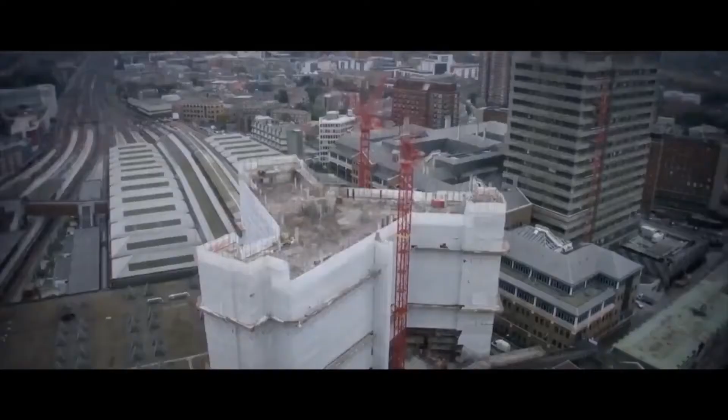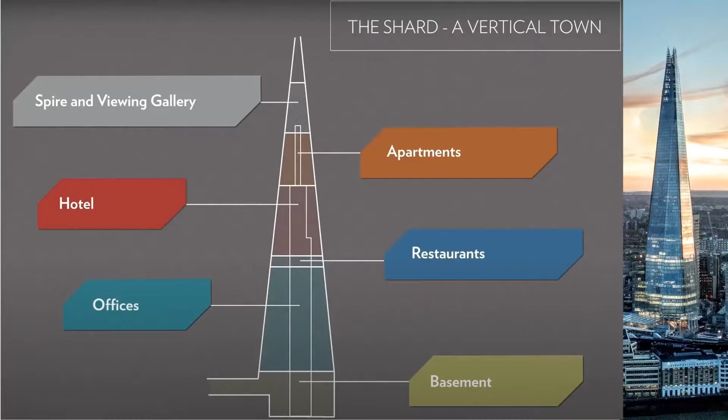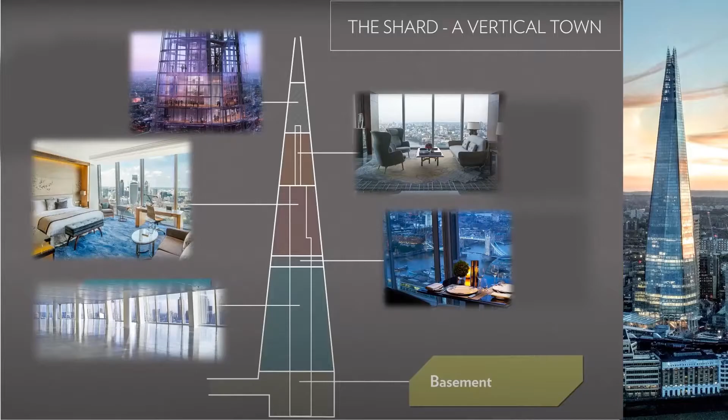Irvine Sellar, the developer of the Shard, wanted the Shard to be a vertical city with a variety of uses. The Shard is designed as a building which can perform various uses for each level. To make space suitable for each application, an optimized design was needed which was not constructible with one structure and one material. So constructors divided the composition of the building into three parts.

First, the Shard's largest and lowest part is used as office. There will be various arrangements for each office's purpose, so the lowest level of the Shard, which has changeable open space, is suitable for office.

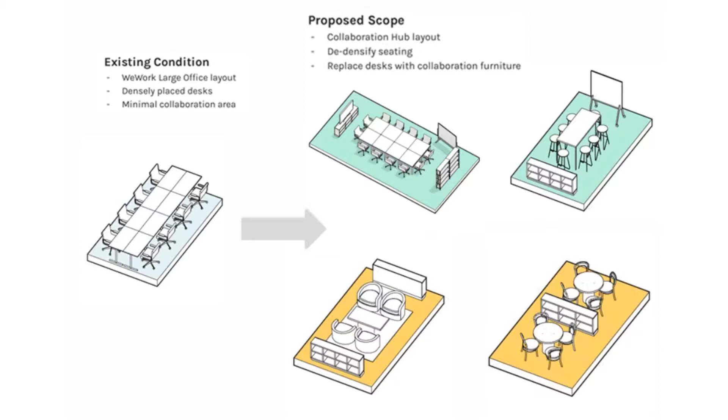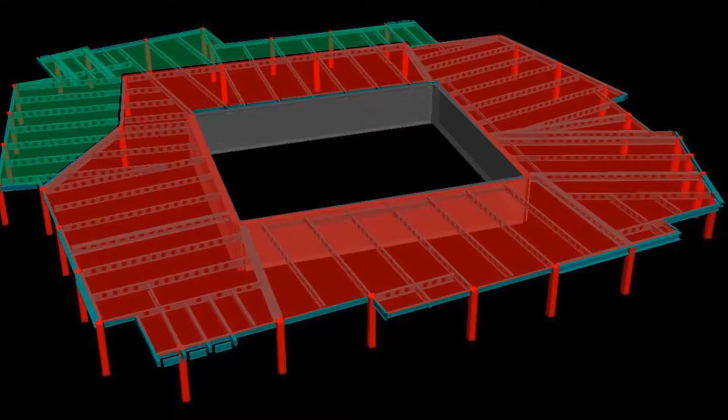To make large open space, designers had to reduce obstacles like columns. Composite beam structure is suitable for this. Due to this structure, very few columns are needed inside the area. The shape of the beam is key to making space without columns.

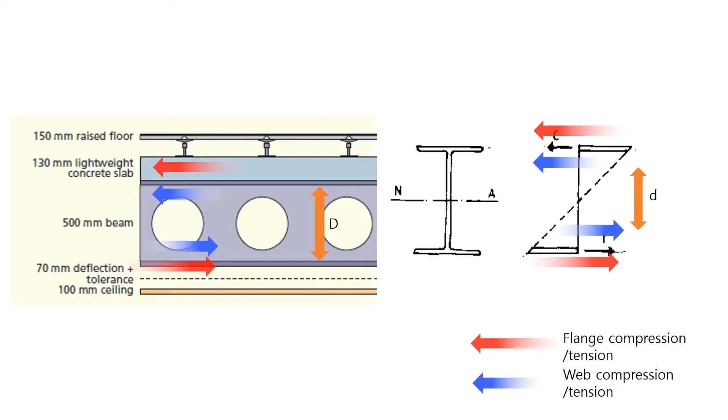The compound beam consists of 500 mm honeycomb beams and concrete slabs. Holes of the beam increased the depth of the web, therefore the moment of inertia of the beam is increased. This increased moment strength could make a 50-meter long beam without columns.

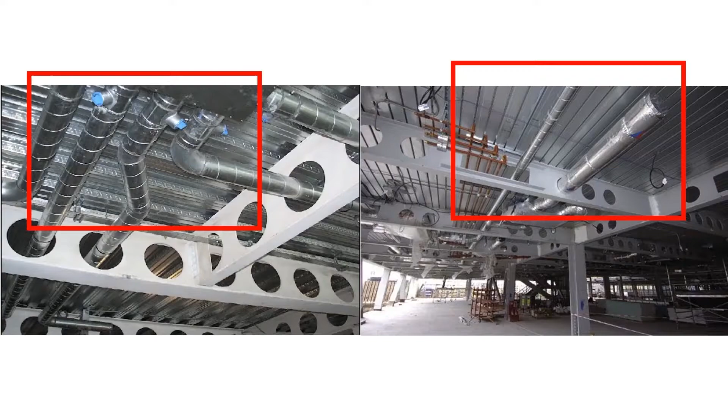And office needs air conditioning, ducts, piping, cables. Honeycomb beam made it possible to make the ceiling very thin, so the height of each floor could be reduced, which increased the number of floors.

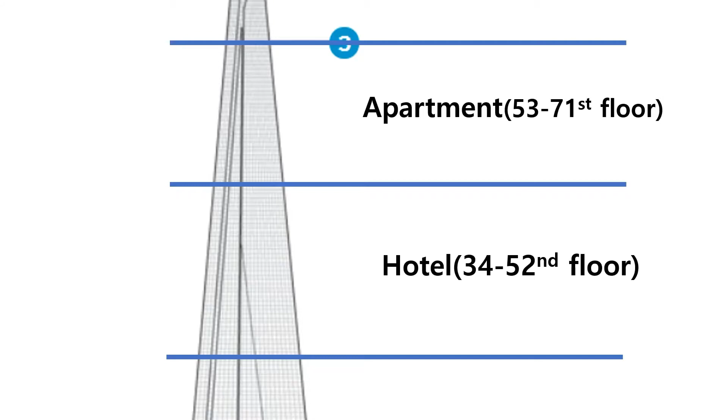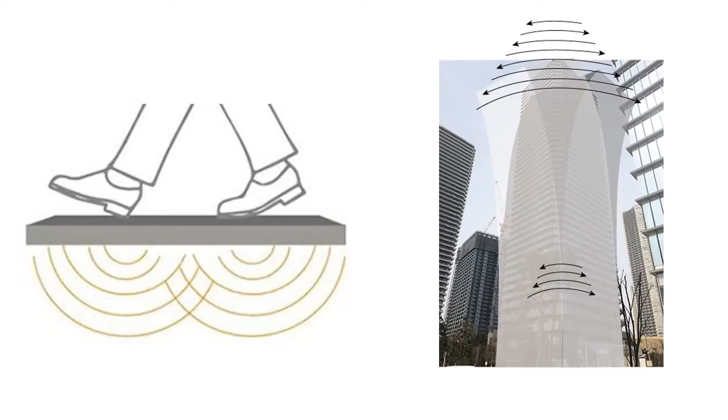Middle part of the Shard is used as hotel and apartment. Hotel and apartment need sound insulation and damper for comfort of residents. Concrete structure was suitable for these needs.

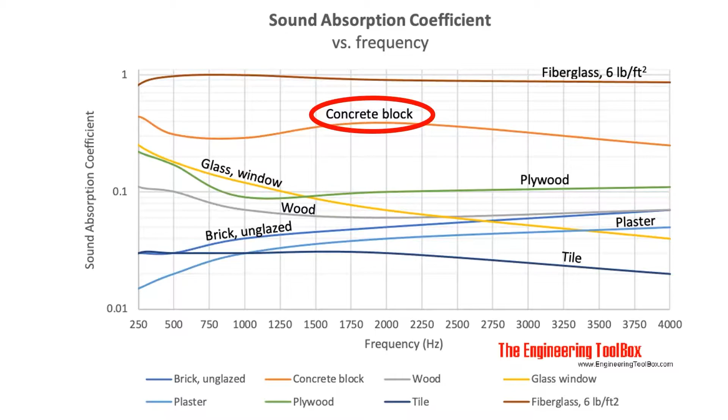Concrete has high specific gravity, which is proportional to sound insulation. Also, as concrete slab is thicker than composite slab, the sound insulation performance of residence floor is better than office floor.

And due to concrete's heavy weight, the concrete part provided damping to minimize lateral acceleration and reduces the swing of the building by wind.

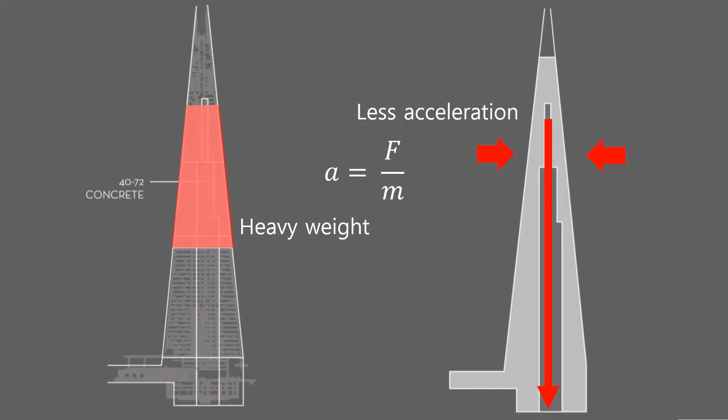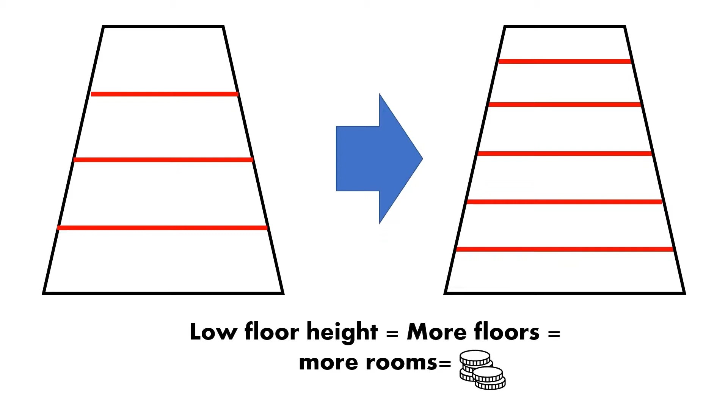And for the profitability of the hotel and apartment, designers had to put many floors in the limited height, so they wanted to reduce the thickness of each floor slab. So the Shard used post-tensioned concrete slab instead of normal concrete slab.

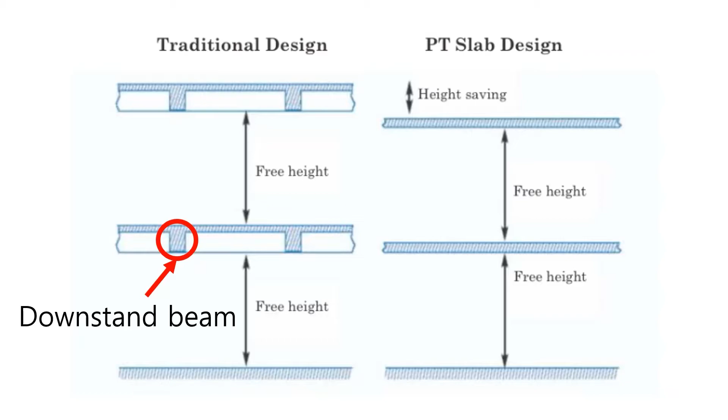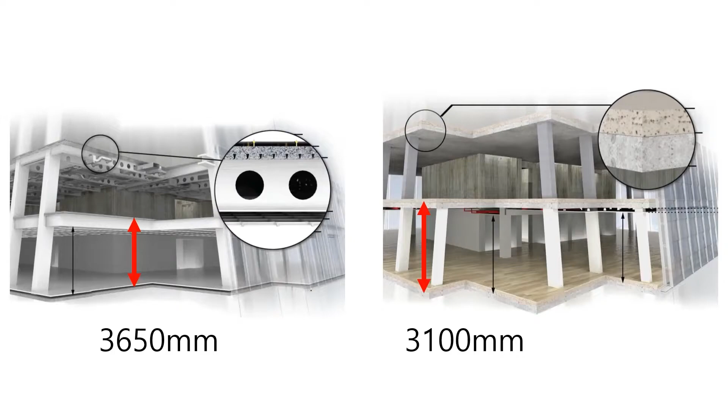Therefore, the downstand beam could be removed, and the thickness of the slab was reduced. So compared to composite beam floor, post-tensioned concrete floor reduced floor height by 550 mm. So extra 2 floors could be added.

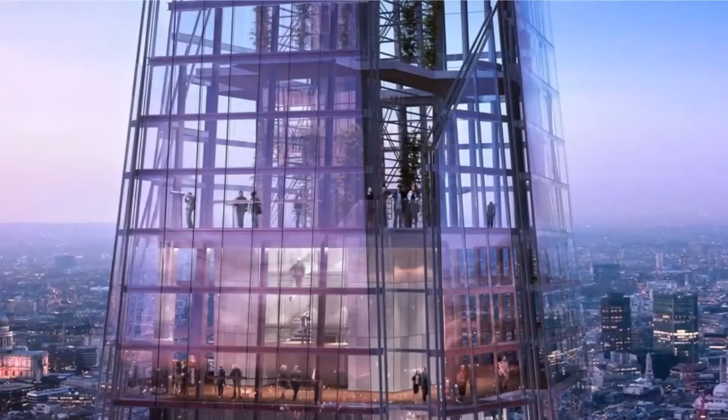The top of the Shard is used as observatory and radiator. The high-rise part of the Shard was not a good environment for apartment because of small area. So the designers made the spire as observatory and radiator.

And because of small area, high height, and fast wind, this huge steel structure could not be made at the site. So engineers adopted the module method.

To lift modules, each module must be lighter than 7 tons, which is the capacity of the tower crane. Each module was prefabricated in the factory of Severfield-Rowen at Thirsk, United Kingdom.

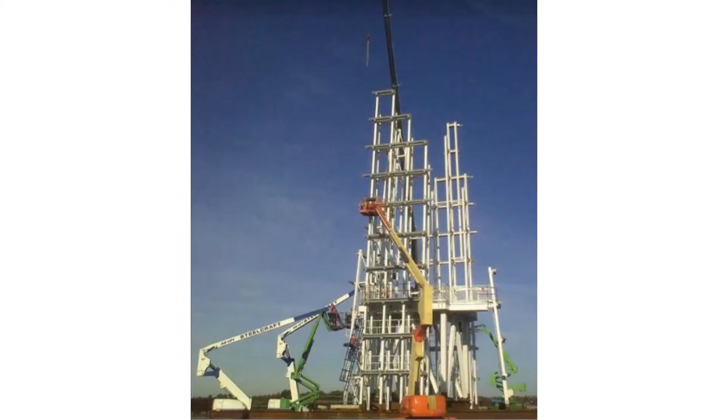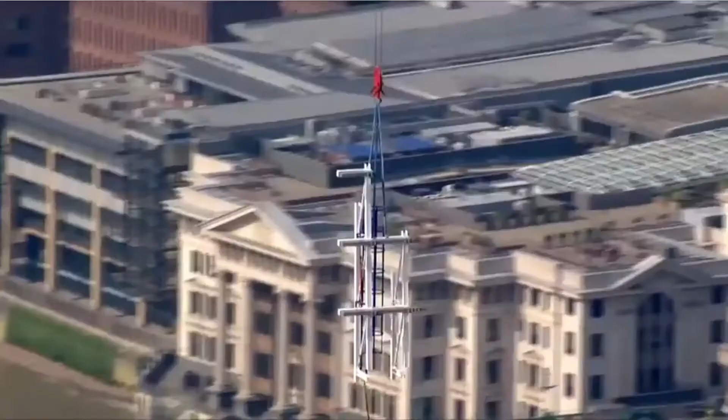To assemble the spire with no mistakes at site, constructors pre-assembled the entire spire at an airfield in North Yorkshire. Each module was lifted to site by tower crane 7 and assembled.

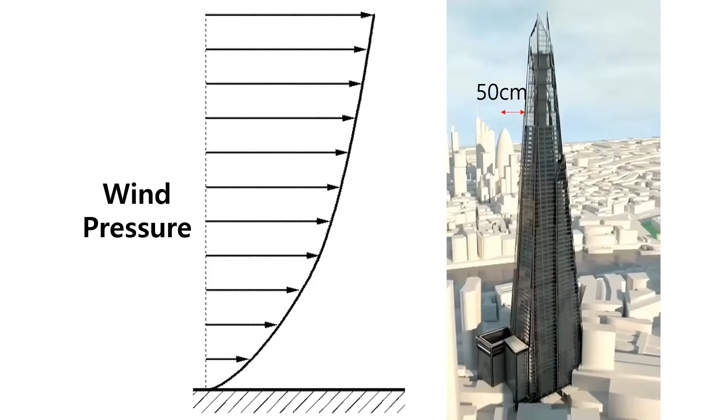An important problem exists in this high-height structure. High-rise buildings need to pay more attention to lateral load management. At this height, lateral load such as wind load must be considered because wind pressure is getting stronger as height goes up. Actually, in strong wind, the Shard is intended to move up to 50 cm.

To take lateral load, engineers designed a hat truss in level 66 to 67. The hat truss distributes lateral load applied to the core to perimeter columns, reinforcing the lateral strength of the building.

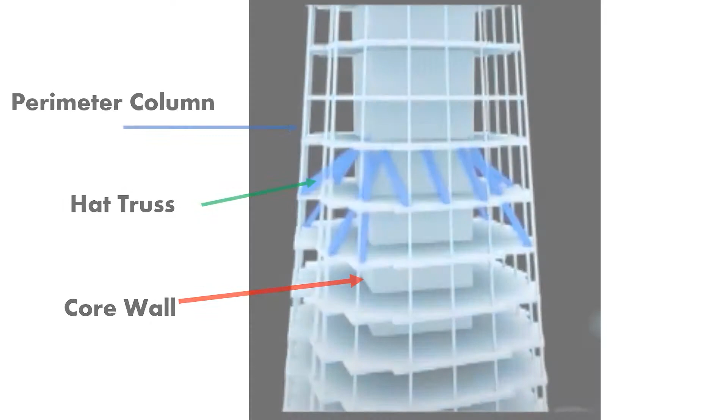It is like a ski pole. When you are skiing, something pushes you laterally. Your arm is the hat truss and the perimeter column is the ski pole.

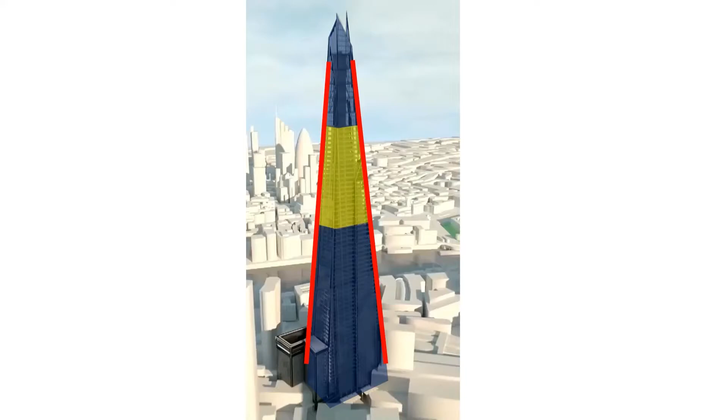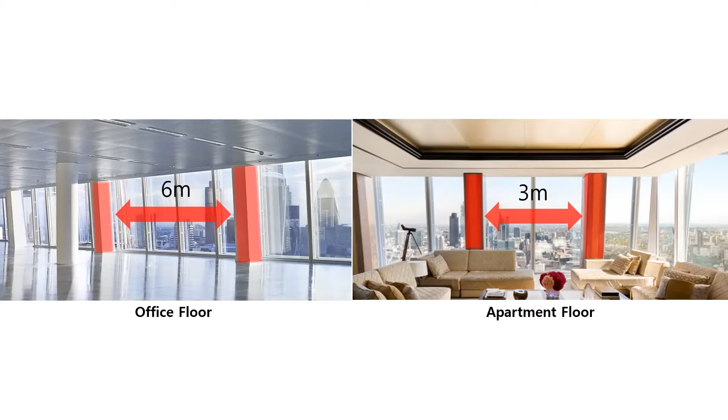But there were two connection problems at the perimeter column. First, there was a problem with the perimeter column span between the composite part and concrete part because of the use of other materials. The perimeter column span of concrete floor and steel floor are different. To make concrete slab without downstand beam, the limit of perimeter column span was 3 meters.

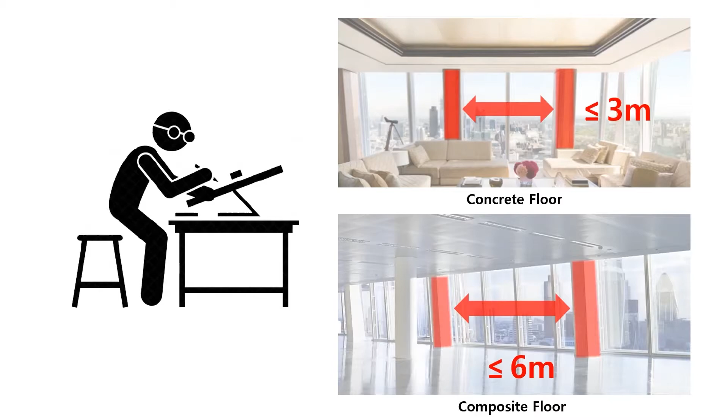Engineers found the solution to connect these two different columns. As a solution, in level 37 to 40, top of the steel levels, a belt truss changes the span of the perimeter column from 6 meters to 3 meters.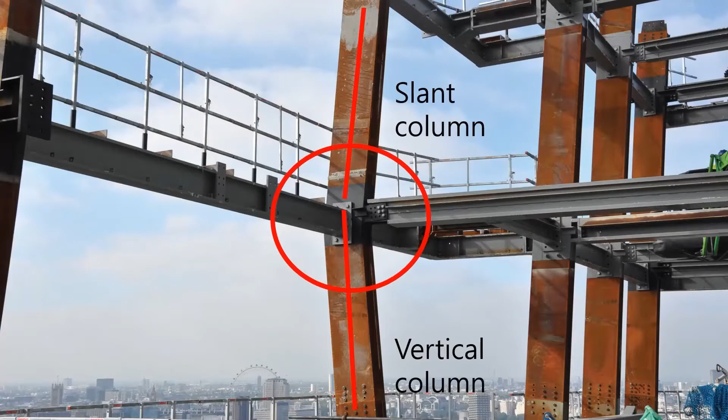And there was another problem in the perimeter column. The Shard seems to have a smooth tapered form, but look closely, it is not. The slant perimeter column transfers to vertical column by a load sharing system.

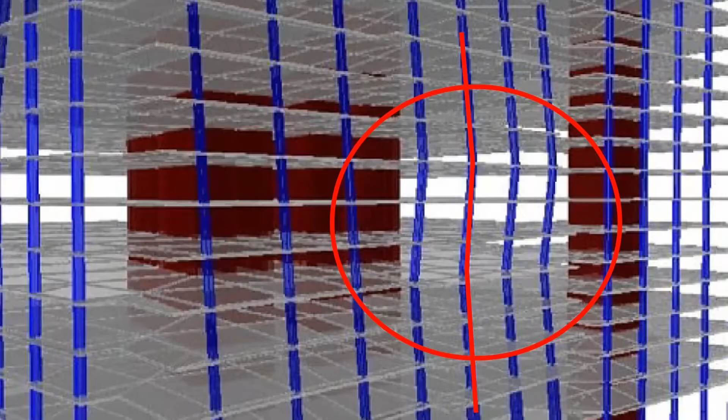There is even a column setback. The inclined perimeter columns step back towards the core because of the limit of ground level. Therefore, the changes of direction generate substantial horizontal push and pull forces.

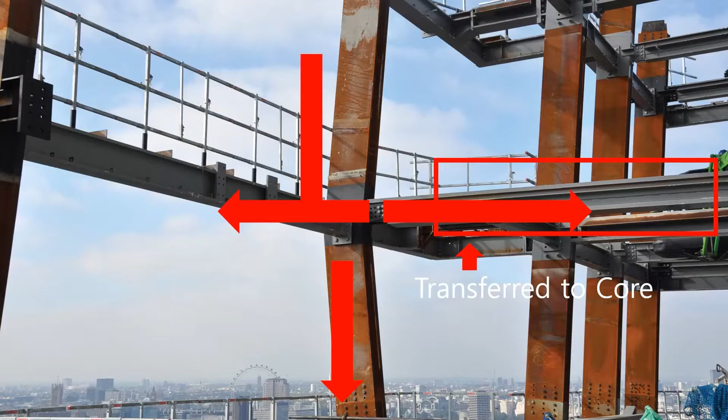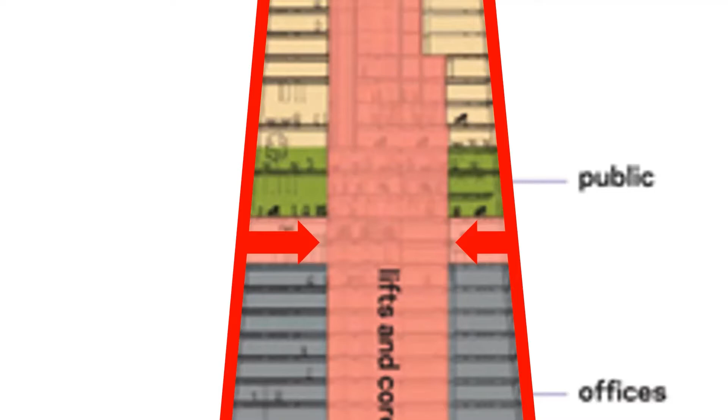These tension forces are transferred to the core by horizontal steel struts. The horizontal load moves from the perimeter column to the core, and the core load is transferred to the foundation.

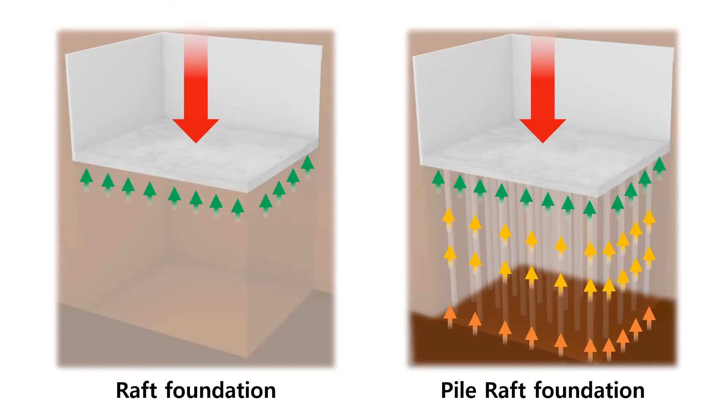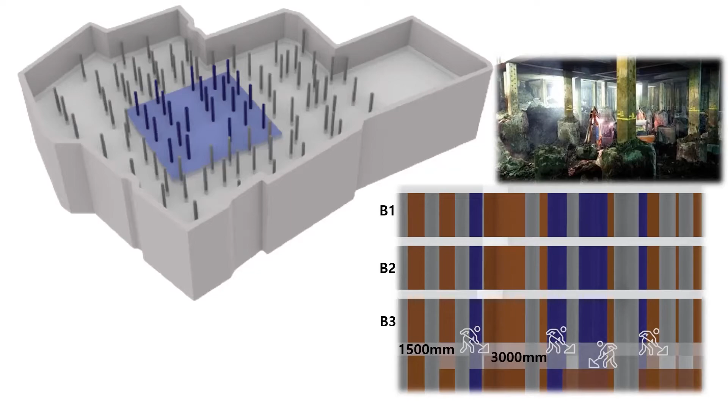The shard used a piled raft foundation to take huge loads. Unlike a raft foundation, the piled raft foundation disperses the load to the piles. The raft directly below the core, which is expected to take concentrated load, was designed at 3 meter thickness, and the rest designed at 1.5 meter thickness.

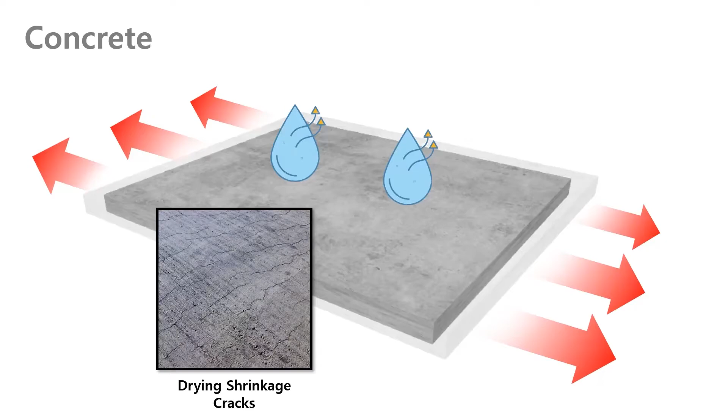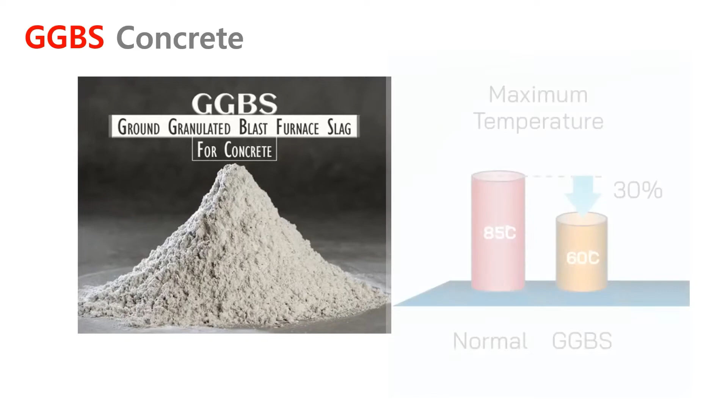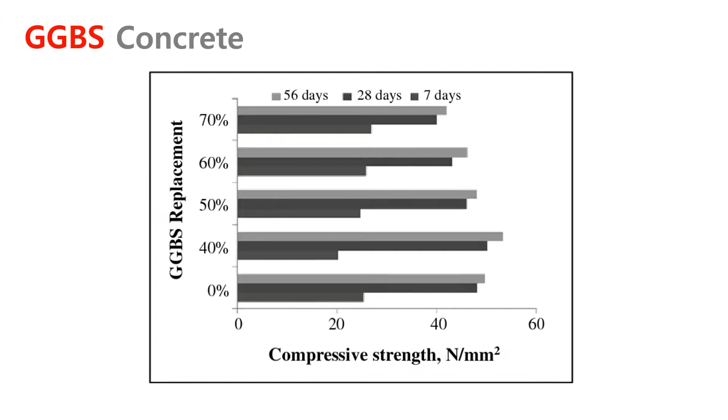In this huge scale of raft work, the problem of dry shrinkage cracks in concrete was important. To solve this problem, the shard used GGBS concrete. GGBS has low hydration heat and low dry shrinkage. GGBS concrete mix doesn't attain full strength until 56 days, compared to normal concrete which gets enough strength in 28 days. So the ready mix was further modified to make sure that enough strength was available at 14 days for work to proceed with core construction.

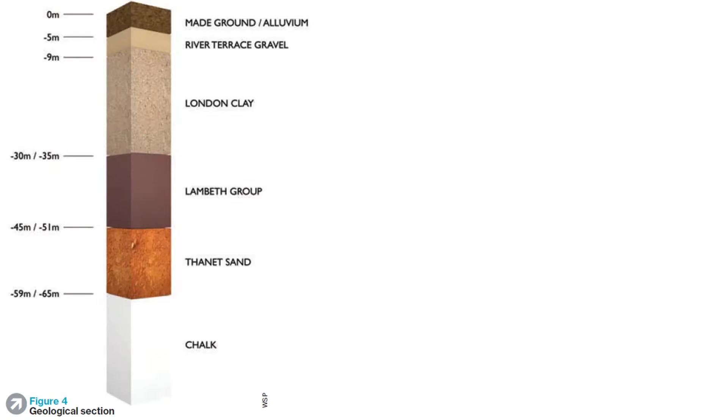Moreover, there were many things to be careful about regarding the ground where the foundation was installed. The shard's ground layers consist of alluvium, river terrace gravel, London clay, Lambeth group, and Thanet sand. There is groundwater between the London clay and Lambeth layers. Due to silty clay's property, London clay holds much pore water, which causes volume change of the soil.

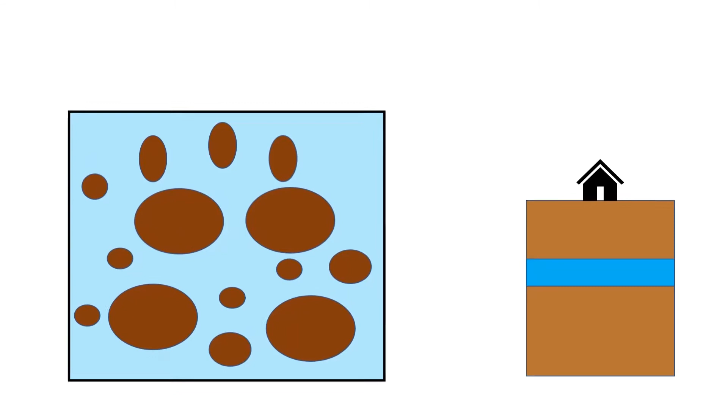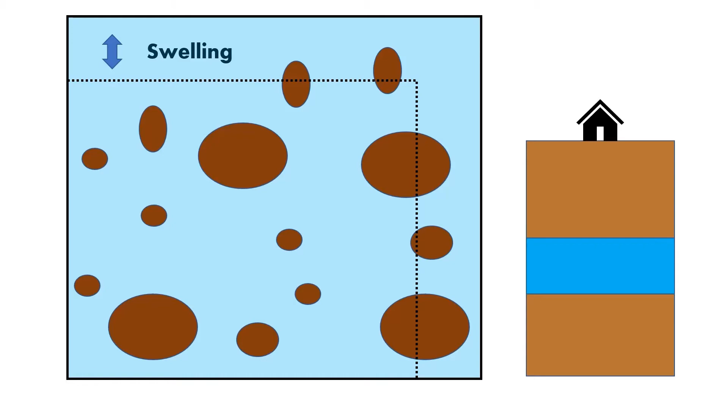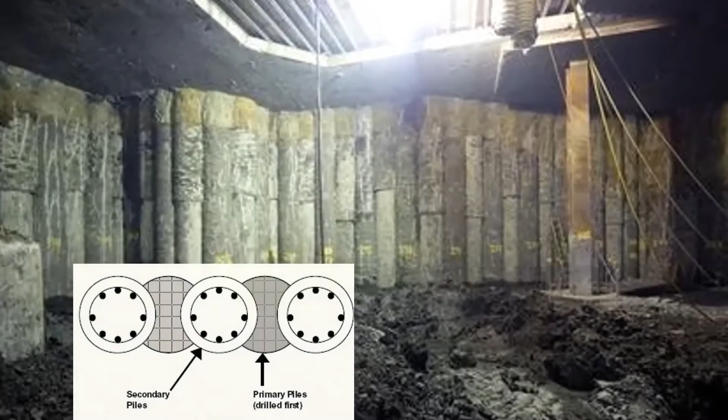It consists of primary piles and secondary piles. Primary piles formed a cutoff to the groundwater in the London clay, and secondary piles have 53 meter depth bearing in Thanet sands, which have more strength and safety compared to London clay.

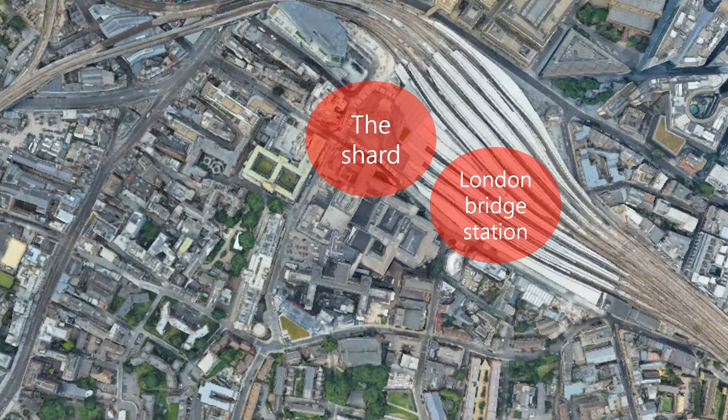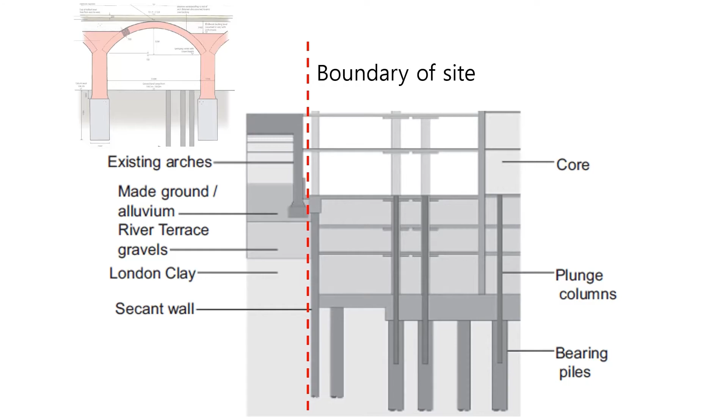When constructing the secant pile wall, there were many problems with the surrounding facilities. The shard is located just beside London Bridge Station, and the London Bridge Station is an arch structure. Because the arch structure and the construction of the shard were too close, and the arch structure was built a long time ago, it could have collapsed due to construction.

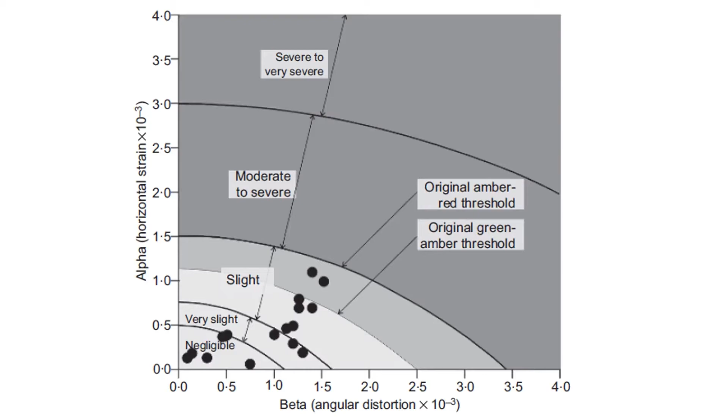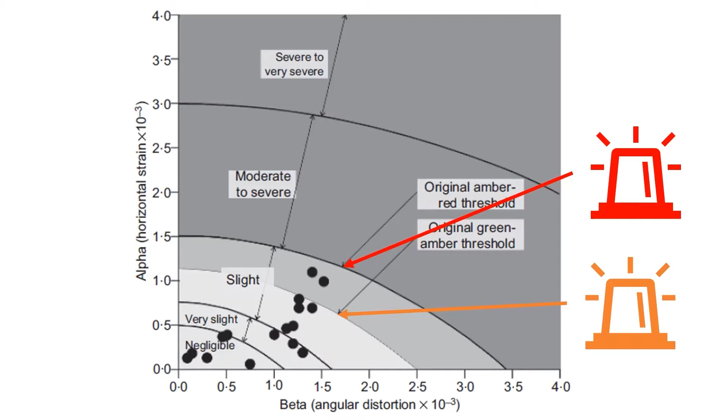Therefore, constructors of the shard monitored the movement of the arch structure. When movements were more than halfway through the slight damage range, an amber alarm would be triggered, and a red alarm was triggered when movement reached the lower end of the moderate to severe damage range.

There's a fault underneath the shard's ground layer, dividing it east and west. The fault made the east Lambeth Group's elevation at the top of strata 5 meters lower than the west. So longer piles were required on the east side of the site.

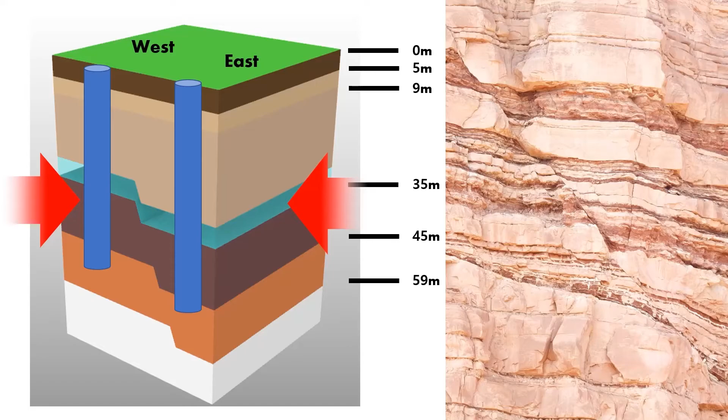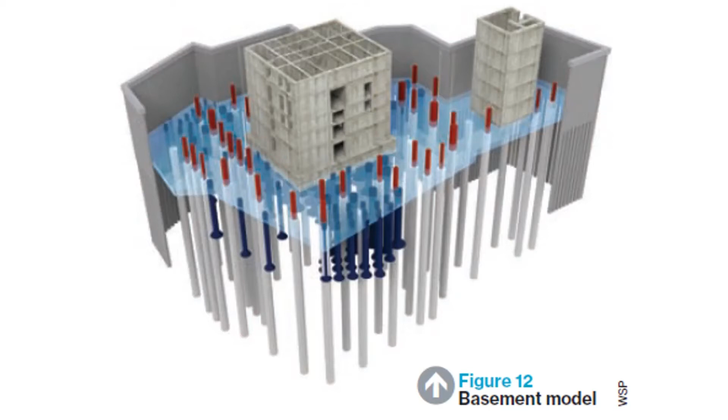Main bearing piles supporting the raft have 1,800 mm diameter, as well as 1,500 mm diameter, which is similar to the secondary piles. This optimized raft and pile design minimized the amount of excavation and material use.

Constructors of the shard used the rotary bored piling method to make the secant pile wall and foundation piles. This piling method has the advantage of minimal ground disturbance, which means limited risk of damage to adjacent structures.

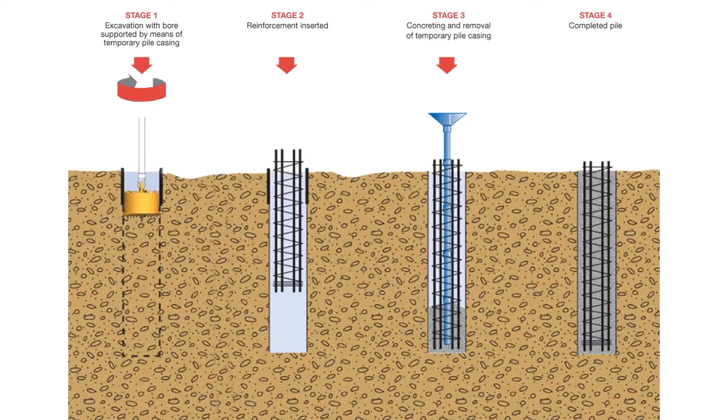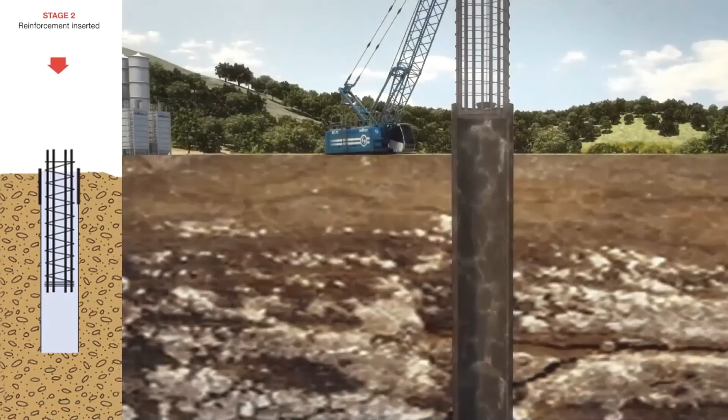First, excavate the soil to make the piles. Second, insert the steel cage. Lastly, pour concrete to make the piles.

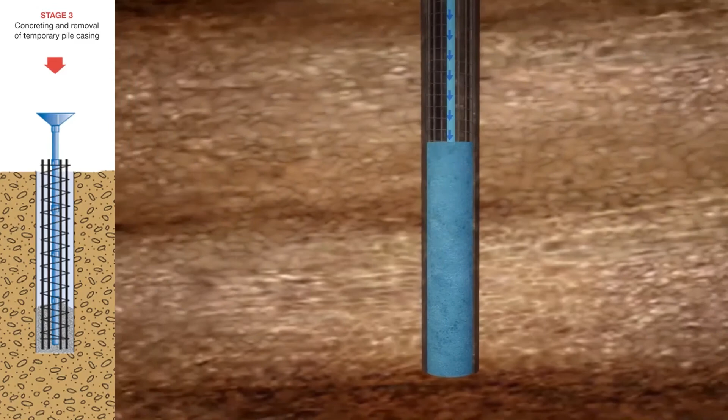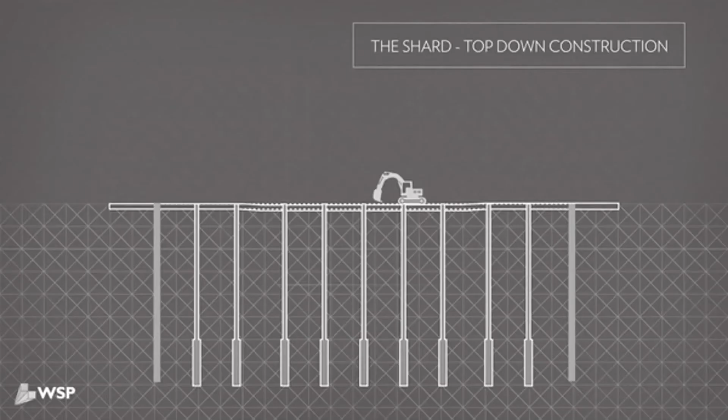After piling, the shard's challenging attempt began. Constructors tried to apply top-down construction to skyscraper construction by installing a plunge column on the foundation piles. Top-down construction is a construction method which excavates underground and constructs the core simultaneously.

After the piling, constructors excavated to basement level 2. After basement 2 excavation, the core slipform is installed above the plunge column and core construction is started. Simultaneously, excavation to basement 3 is started. When the core reached the 21st floor, basement 3 excavation was finished.

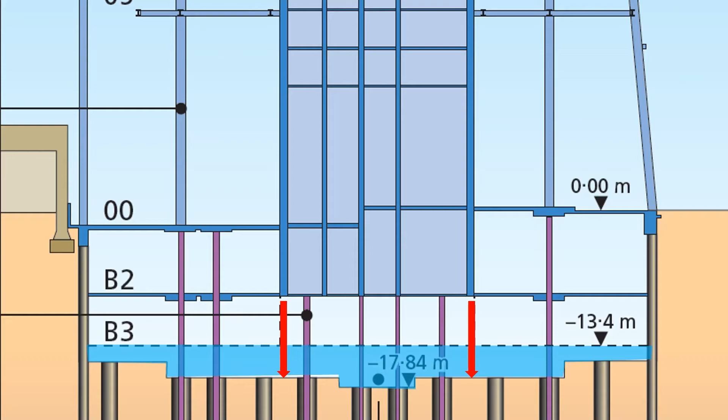After basement 3 excavation, constructors started raft concrete pouring and connected the core wall and raft. After the raft was finished, top-down construction was completed. As a result, they reduced construction time by at least 3 months.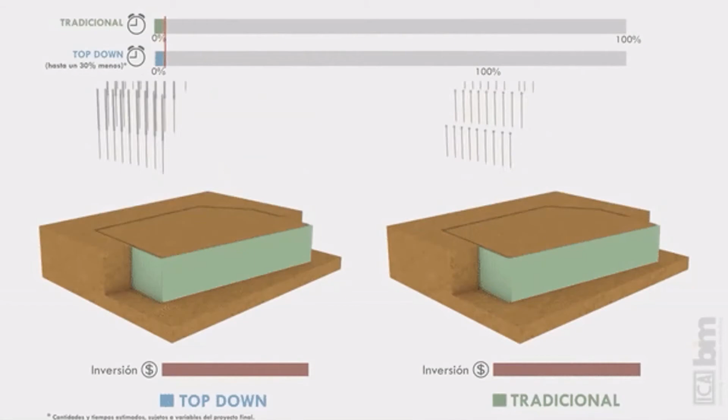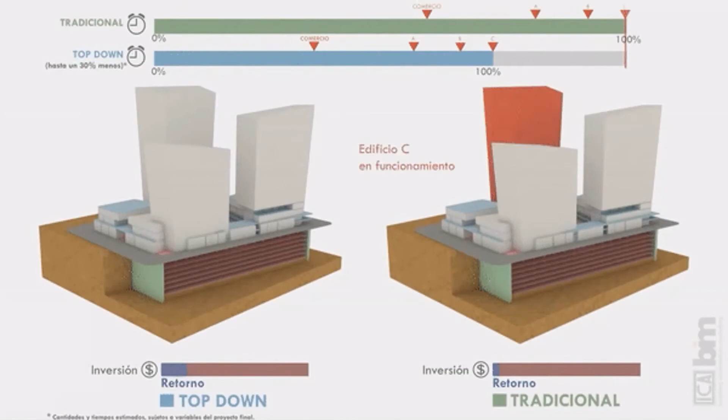Step-by-step excavation and construction happened simultaneously for both ground and basement floors. This characteristic shows much faster speed compared to traditional bottom-up construction. In fact, the shard was constructed in 35 months, from March 2009 to December 2011.

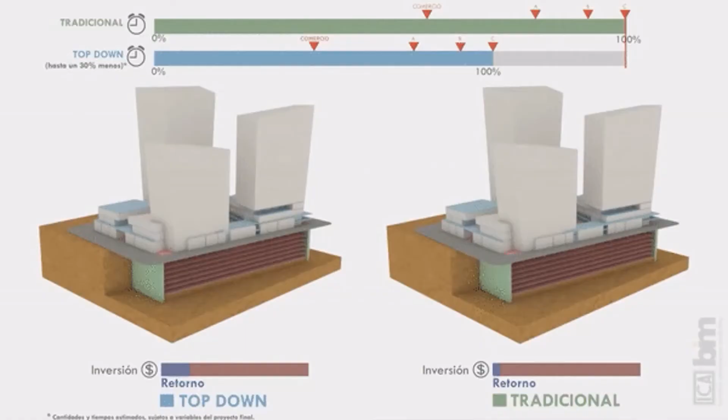There was a reason why the shard adopted the time-saving method. The construction of the shard was delayed due to the 2008 financial crisis, and it had to be completed before the 2012 London Olympics. To meet the deadline, the shard applied many methods to reduce construction time.

One of them was the shard's crane solution, which goes up with the slipform. The core crane was attached to the core shaft. At the base of the core crane, wheels on the base ran on guide tracks of the shaft to keep the crane vertical.

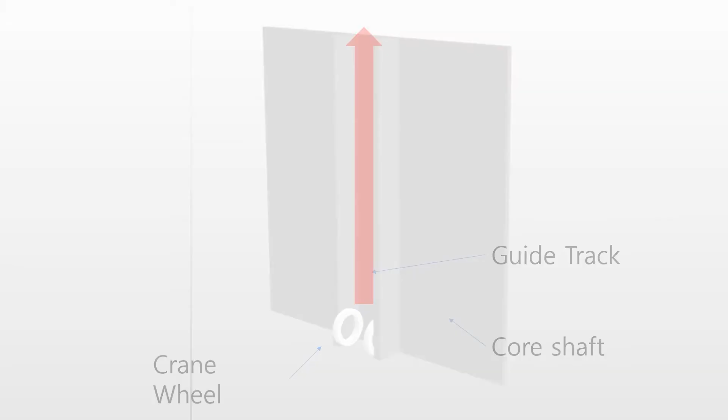By this method, the slipform didn't stop while the crane moved upward, which happens in normal construction. Therefore, core construction delay was eliminated. In addition, core cranes are less affected by wind, so there was less risk of collapse and no risk of construction interruption due to wind effects. By this way, the shard could shorten the construction time.

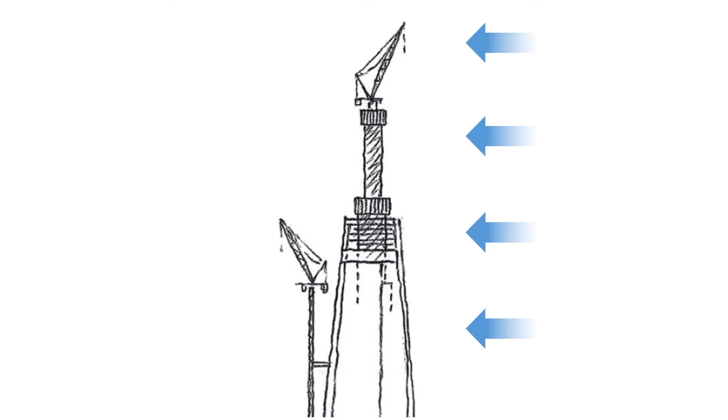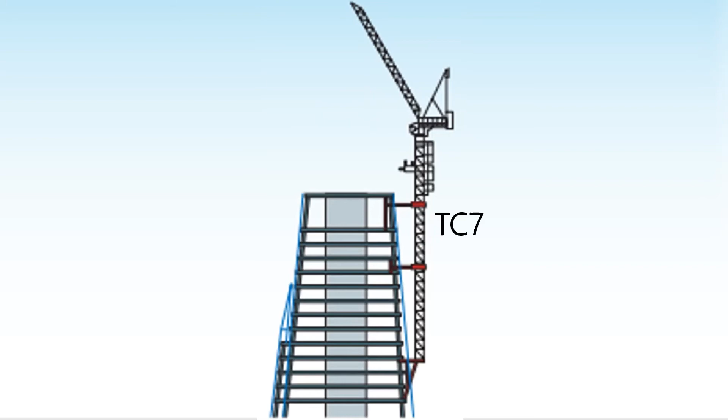After completing core construction using the slipform method, tower crane 7 was installed by tower crane 1 for spire construction. And tower crane 7 dismantled tower crane 1. After the installation of the spire, the disassembly process began.

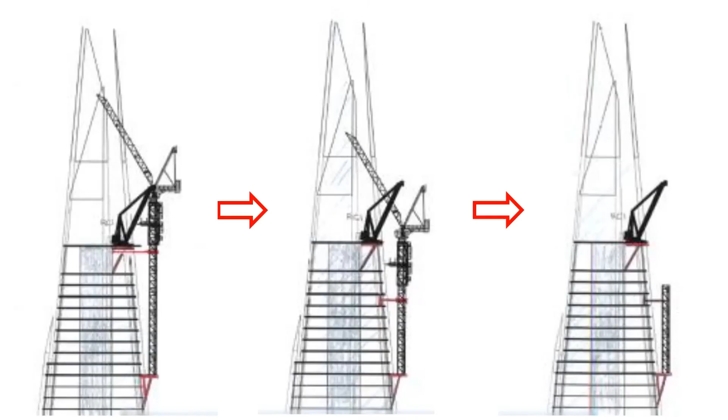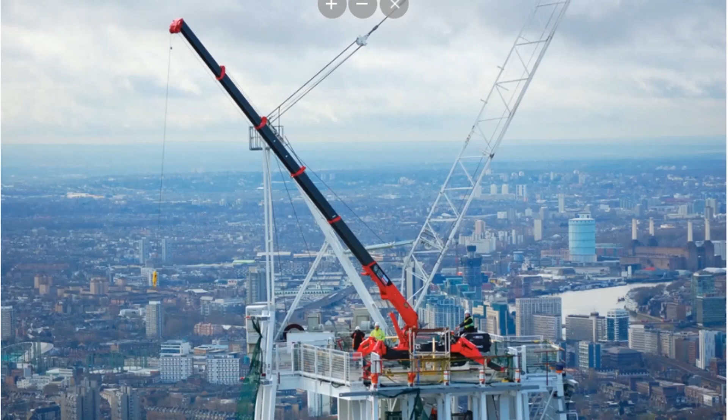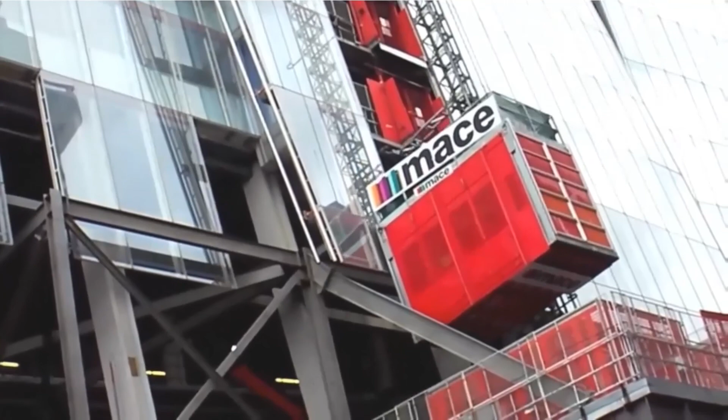First, when lowering the crane, it went down to the 70th floor using hydraulic pressure, and removed TC7 by recovery crane. The recovery crane is removed by the spider crane. The components of the spider crane and recovery crane are lowered to the ground through the external hoist.

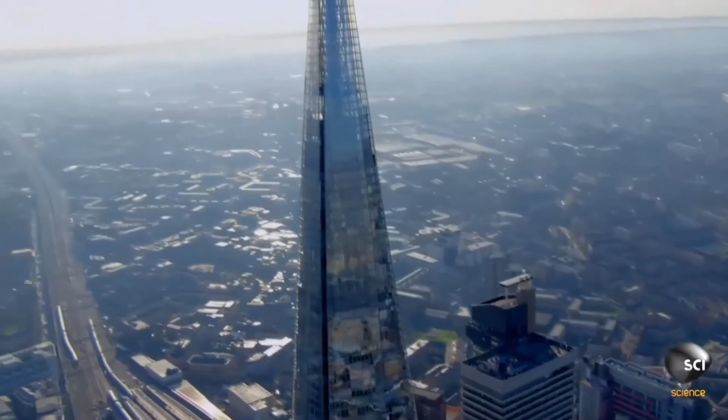So the construction of the shard is ended. The shard became the highest building and landmark of London.